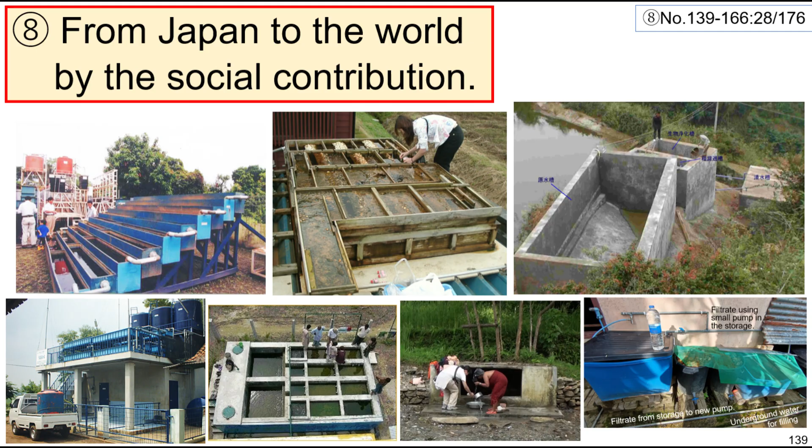Part 8. From Japan to the World by the Social Contribution. JICA Hiroshima Lecture in 2025 on Ecological Purification System. Indonesia, Underground Water, China, Bangladesh, Nepal, Malaysia. Toward Zero Waste World by Chemical-Free System. Smart treatment system to make artificial spring water by eco-friendly technique.

This EPS is our technology. I cooperated with Yamaha Motors' social contribution activities by EPS technology. There was a factory in Jakarta, Indonesia that manufactured engines for outboard motors, boats, motorcycles, and other automobiles. Since it was related to water, they also manufactured water purifiers. Yamaha Motor Company in Indonesia made a purifier for clean and safe water in 1991.

Mr. Yagi came to Shinshu University. He asked how to make safe drinkable water without chemicals from an unsuitable source of water. Underground water contains iron and manganese in Jakarta Plain. Well water was clear, but the brown colloidal particles were formed soon. They could make clear water using a cascade aeration system without any chemical reagent.

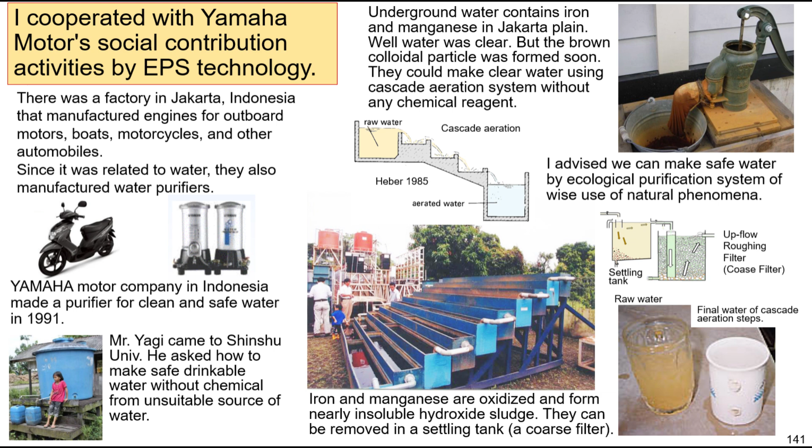I advised we can make safe water by an ecological purification system of wise use of natural phenomena. Iron and manganese are oxidized and form nearly insoluble hydroxide sludge. They can be removed in a settling tank, a coarse filter. They planned to make a pilot plant in a rural village. I also explained how to make clear water in a rice field.

Small animals collect silt and colloid particles in dirty water by the food chain. Then water becomes clear. They made a plant. Active growth of algae and grazing animals grow well in the channel. Active photosynthesis keeps aerobic condition. Periodical small drain to eliminate precipitate material and unhealthy organisms.

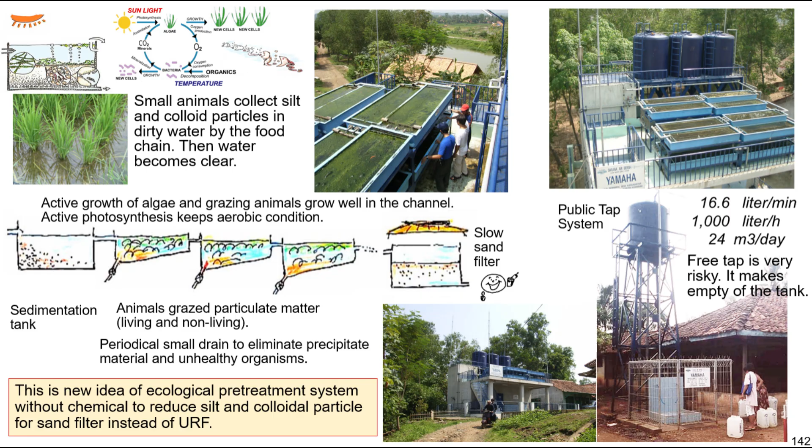This is a new idea of ecological pretreatment system without chemicals to reduce silt and colloidal particles for sand filter instead of URF. They adopted a public tap system. A free tap system is very risky. It makes the storage tank empty. The tap keeper collects money for filling the bottle for the maintenance cost of the plant.

This water is used for drinking and cooking only. This water is not used for bathing and washing hands. Diarrhea and eye sickness disappeared. Sanitary sense and its level are distributed among the villagers. This acts to protect naturally against sickness. One safe drinking water system which can be maintained by local villagers as a social contribution of Yamaha Motor Company.

2. A pilot test plant with several public taps was donated from Yamaha Company to Kagawang village near Jakarta, Indonesia. 3. Villagers discussed how to maintain this plant by villagers. 4. Villagers decided to collect money from the users in order to stock for maintenance. 5. The water committee started a delivery service to other villages. 6. The water committee maintains it more than 15 years without any trouble.

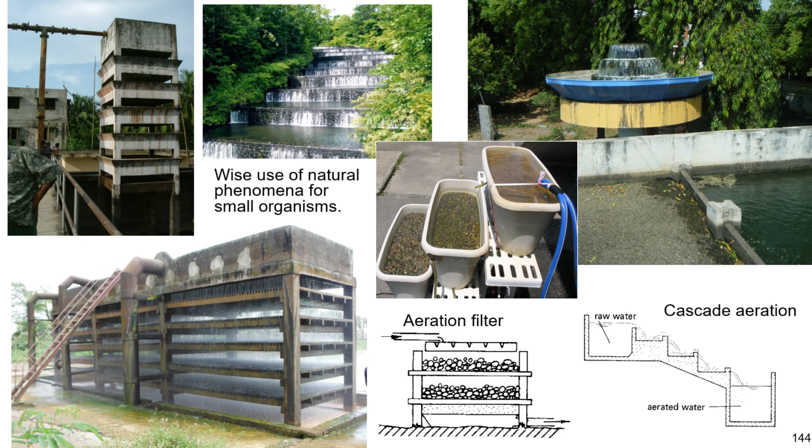Underground water is sometimes not good quality for direct drinking. We will apply wise use of natural oxidation process for small organisms. Key is addition of oxygen. High concentration of iron and manganese in tube well water was treated by cascade aeration with an ecological purification system. Pre-treatment of cascade aerator using biological activity of bacteria, algae, and animals, and final treatment of slow sand filter.

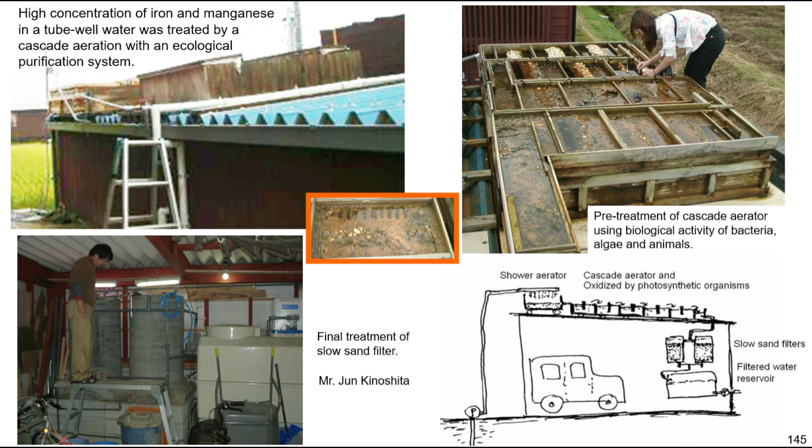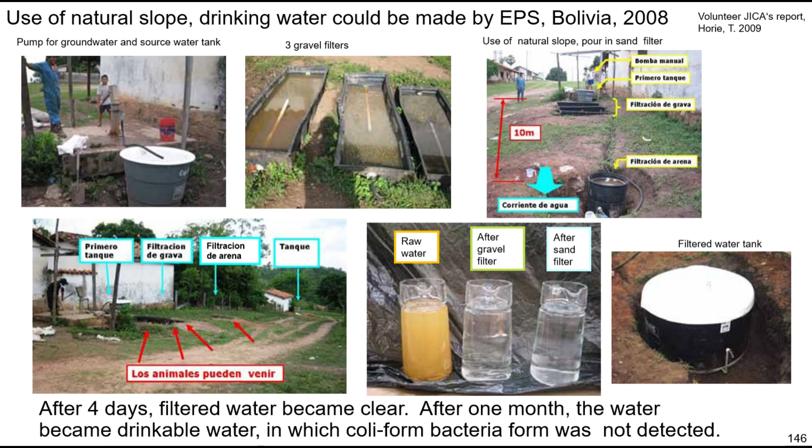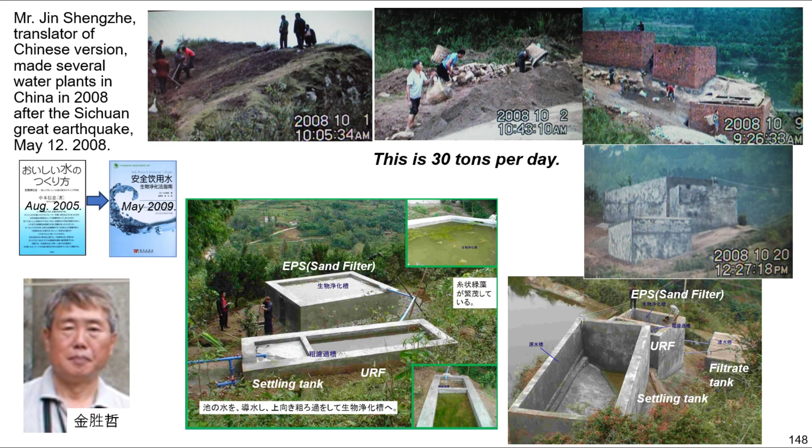India in 2008. Mr. Jin Shengzhe, translator of the Chinese version, made several water plants in China in 2008 after the Sichuan Great Earthquake, May 12, 2008. Mr. Hua Daishan and his sons built EPS to make several safe drinking water plants, helped by Mr. Jin Shengzhe. Finally, Mr. Hua and his sons made more than 40 plants of EPS by themselves.

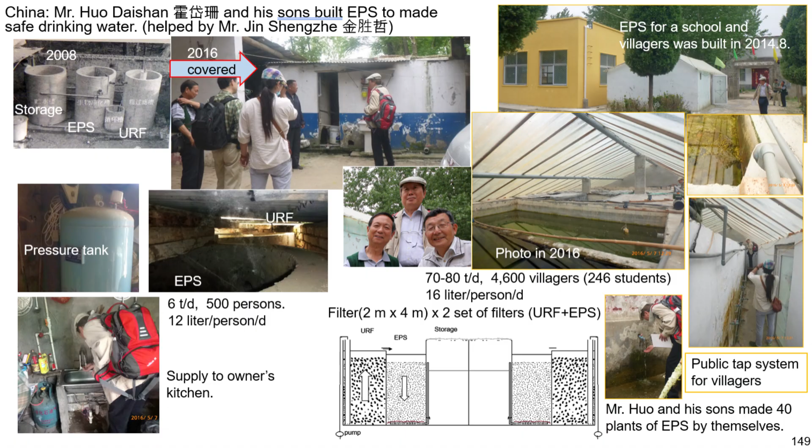NHK World Living Beyond Boundaries reported this Chinese activity of EPS plants for rural people on December 13, 2014. In this report, they announced EPS originated in Japan. Since 2002, I have cooperated with the Asian Arsenic Network, AAN, NGO, activity in Bangladesh.

Surface water is polluted. The people use underground water. However, this water was contaminated with arsenic. AAN checked the arsenic contamination. AAN made a slow sand filtration system for safe water.

I advised a better SSF system using biological activity to AAN. Then, I was asked to consider a mechanism that can decompose pesticides without using chemicals. I explained the repeated growth of algae and decomposition by grazing animals, and real decomposition of pesticides and herbicides under anaerobic conditions in fecal pellets.

They made a water purification system by EPS function. Repeated URF process of algal growth and decomposition by animals 4 times. DO in water is necessary for animal activity in this system. Mr. Kawahara, leader of AAN, said to me this is not SSF. Then I proposed this is an ecological purification system, in Bangladesh in 2004.

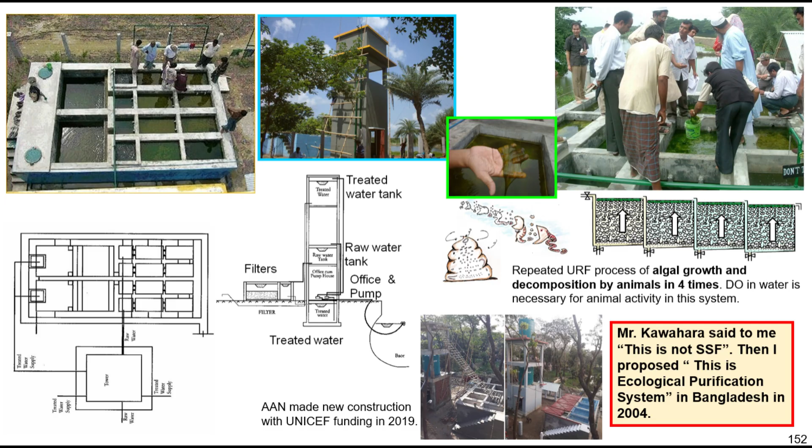In a mountainous country like Nepal, many houses are scattered on the slope. They use natural springs on the slope. I visited Nepal in September 2011. There were many spring waters. These waters, by a natural purification process, are always clear and safe to use.

Nepal is a mountainous country with a lot of precipitation. They also used rainwater. Spring water is abundant, and it is drawn through pipes and used carefully. Because of the large difference in elevation, it is difficult to adjust the water pressure with large diameter water pipes. In a mountainous country like Nepal, it seems that using spring water is a good way.

This is the water source for Akan Water Works, Hokkaido, Japan. Porous pipes were placed under the gravel bed in a river. Almost suspended-solid-free water is taken for a slow sand filter plant. This is an intake of artificial subsurface water. In the case of a mountain area, we can find good quality spring water. Wise use of natural purified water is the best.

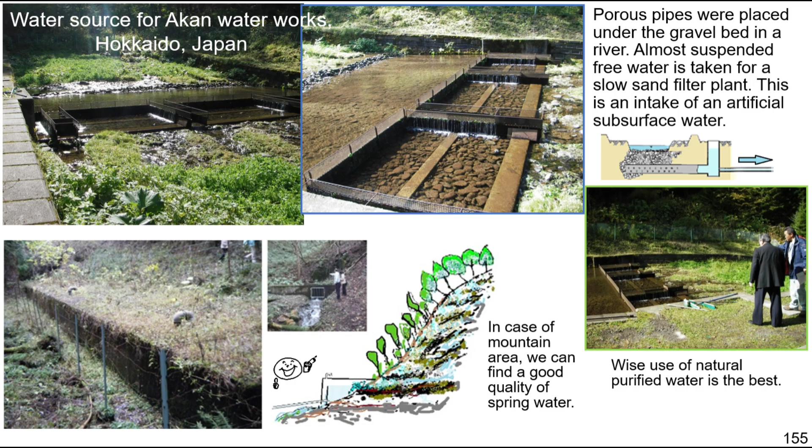Ecological purification system, EPS, is wise use of natural phenomena. This is a chemical-free system to make artificial delicious spring water. This is a smart and eco-friendly technique. The key is the presence of dissolved oxygen for biological activity. We can make an EPS purification device ourselves.

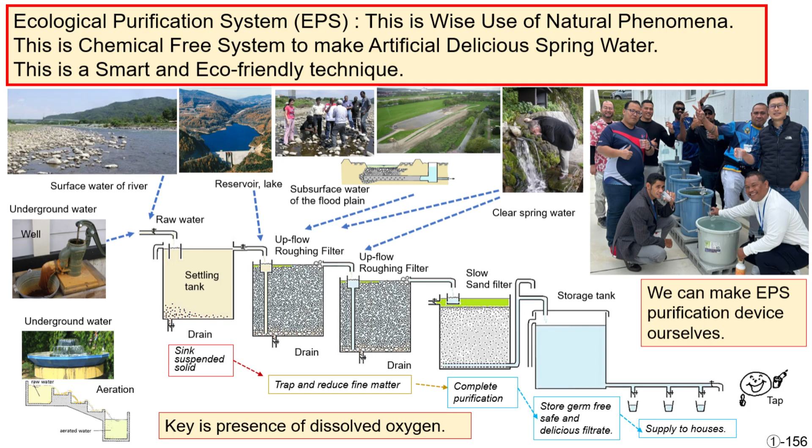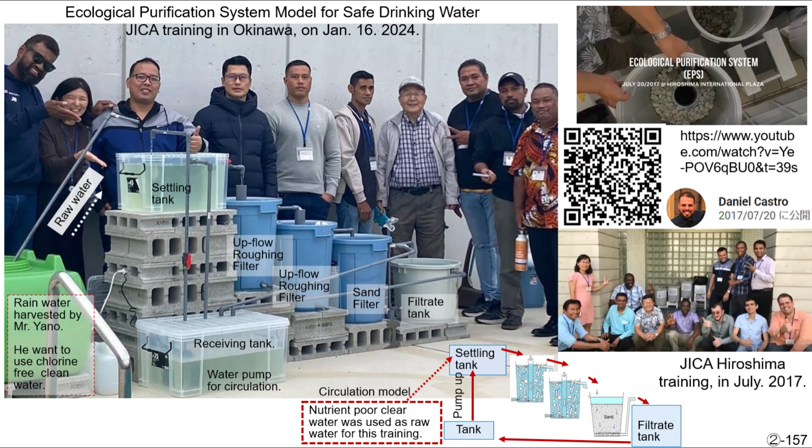I taught the ecological purification system model for safe drinking water at JICA training in Okinawa, on January 16, 2024. This is a circulation model of 2 URF systems. Mr. Zairi, a trainee of JICA Okinawa, returned to Malaysia after JICA EPS training in Okinawa from January to February 2024. He applied EPS knowledge at his brother's house in April 2024.

On April 6, he washed the sand. And the EPS model was completed on April 11, 2024. Finally, his first EPS bucket model launched with a purification rate of 7.2 meters per day. He mentioned the volume of the storage filtrate tank was 56 liters. He mailed that he hoped that after a few weeks, when the algae start growing, the quality and production rate may improve.

On April 11, 2024, Nakamoto: Thank you for your effort to make the EPS model. I suggest that it is better to remove some gravel in the URF. We can confirm the condition of the URF which produces clear spring water. However, please cover the overflow pipe with gravel.

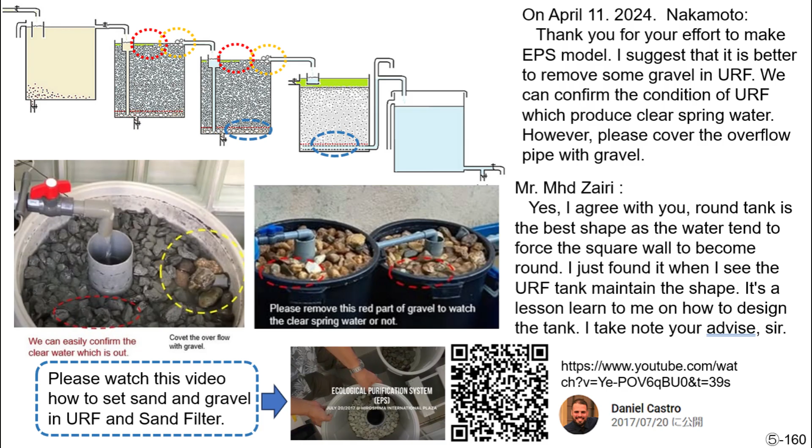Mr. Zairi: Yes, I agree with you, a round tank is the best shape, as the water tends to force the square wall to become round. I just found it when I saw the URF tank maintain the shape. It's a lesson learned for me on how to design the tank. I take note of your advice, sir.

On April 11, 2024, Nakamoto advised: Well water, underground water, tube well water often contains iron and manganese. Since there is sufficient dissolved oxygen in the URF, these metal ions are removed by oxidation and precipitation. Precipitated iron and manganese accumulate on the gravel surface and at the bottom of the URF.

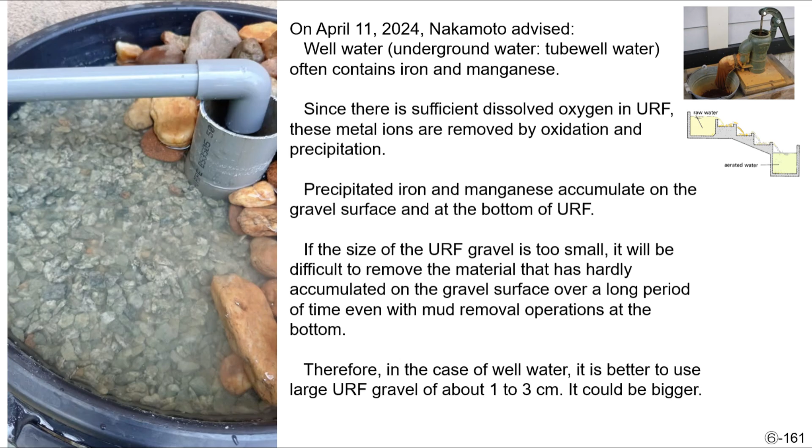If the size of the URF gravel is too small, it will be difficult to remove the material that has hardly accumulated on the gravel surface over a long period of time, even with mud removal operations at the bottom. Therefore, in the case of well water, it is better to use large URF gravel of about 1 to 3 centimeters. It could be bigger.

Nakamoto, April 11, 2024. Round tank is better for the model. Round tank is gentle for small organisms. If the sand filter tank is square, when sand or water enters, the tank will try to become round and expand. The actual facility is made of concrete, which is good.

Nakamoto, April 12, 2024. I suggest that you please put an L cap and cover with mesh to keep out dust and animal contamination from the filtrate water. What we call the flow rate is in the supernatant water over the sand layer. The real flow rate in the sand layer becomes about double.

Nakamoto, April 12, 2024. The filtration speed of the sand filter tank is 7.2 meters per day in the water layer above the sand, or 30 centimeters per hour. In the sand layer, water passes through the gaps between the sand. The space per volume is about half. The speed will be approximately doubled. Therefore, the flow rate of water in the sand layer is 60 centimeters per hour.

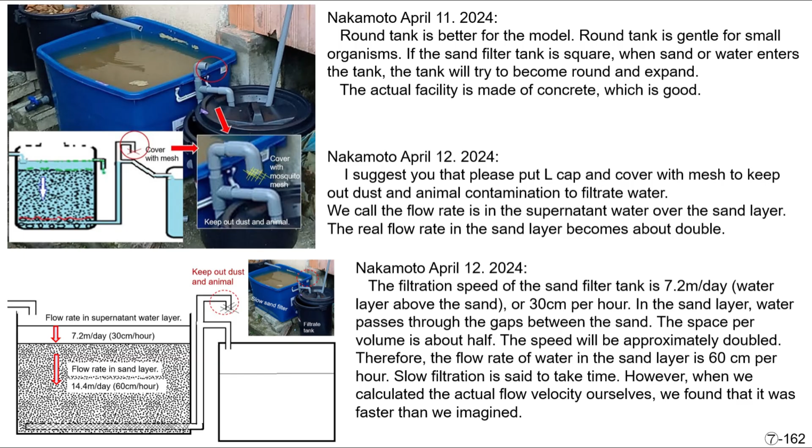Slow filtration is said to take time. However, when we calculated the actual flow velocity ourselves, we found that it was faster than we imagined.

Mr. Zairi, September 15, 2024: just came back to my hometown in Kelantan after 5 months installing the EPS. Thank you for the knowledge you share, which benefits the people in rural areas to enjoy crystal clear, clean and delicious water. I feel proud and thankful for the knowledge I gained from the JICA program. In addition, I want to share with all of you, the upflow filtration method is super value for money, maintenance and stress-free compared to normal downflow filtration.

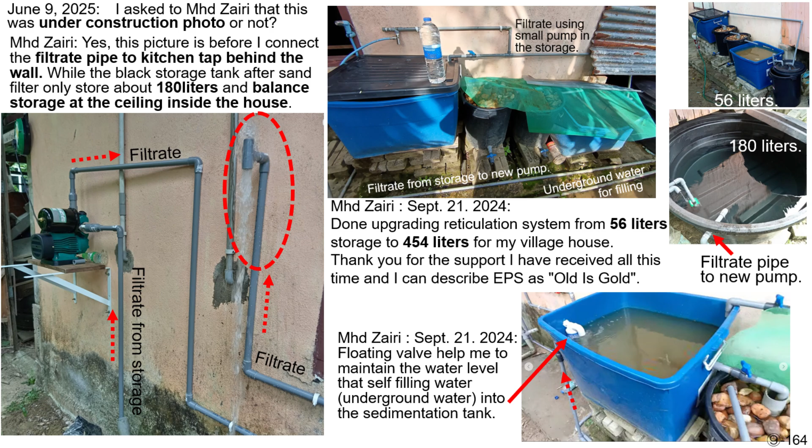June 9, 2025, I asked Mr. Zairi whether this was an under-construction photo or not. Mr. Zairi: yes, this picture is before I connected the filtrate pipe to the kitchen tap behind the wall. The black storage tank after the sand filter only stores about 180 liters, and the balance is stored at the ceiling inside the house.

Mr. Zairi, September 21, 2024. Done upgrading the reticulation system from 56 liters storage to 454 liters for my village house. Thank you for the support I have received all this time, and I can describe EPS as Old Is Gold. Mr. Zairi, September 21, 2024. The floating valve helps me maintain the water level, self-filling underground water into the sedimentation tank.

On January 25, 2025, Mr. Zairi: I took these Chinese New Year holidays to review my EPS filtration after 8 months commissioned. The result still produces the same fresh, cool and refreshing water. This is super clean, delicious water.

On June 6, 2025, Mr. Zairi: comparison between the first URF and second URF. It shows the first URF works well in filtration for underground water. Nakamoto: you mentioned that the water source is underground water. The first drain is brown. This means oxidized iron and other metal ions. The second is clear. This means that only one URF is very effective to remove dissolved metal ions in the underground water. I would like to set 2 URFs for a safe system.

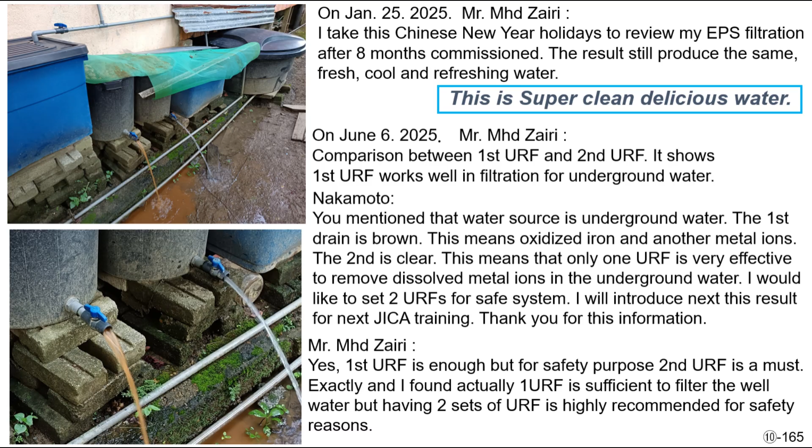I always say don't be afraid of failures. People always make mistakes. We think we are lucky if we fail. The experience of failure gives rise to a true understanding of technology. Remember, 3 points worth remembering.

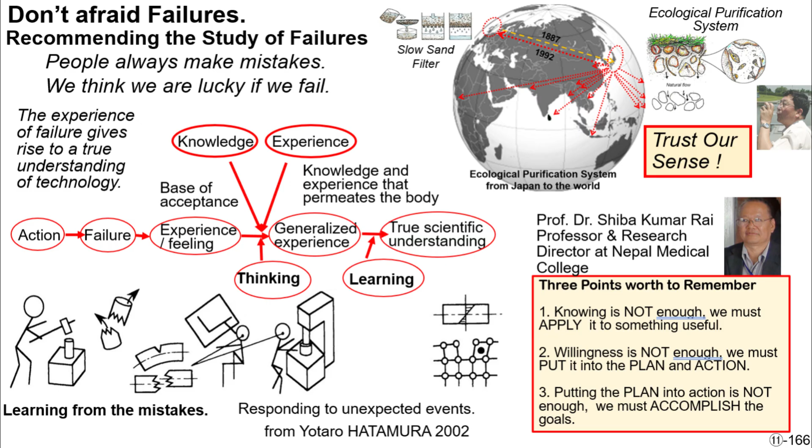This is part 8 of the EPS lecture in JICA Hiroshima, 2025. This lecture continues to part 9.